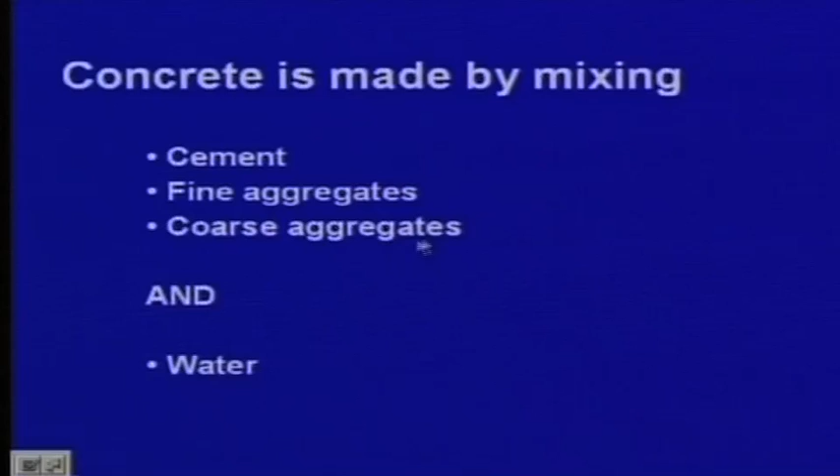As I have told in the last class, concrete is made by mixing cement, fine aggregates, coarse aggregates and water, and the proportion also I have shown as a schematic: coarse aggregates, sand, cement and water. I have already told in the last class, just to repeat one or two slides. We shall come to what is called workability.

Workability means the fresh concrete, or we call it green concrete, can flow. You can mix it, you can put it in any way and you can get any shape. So, it should be workable. If you add less water, then it will be almost dry, you cannot get the required shape, and it may immediately break. If you have more water, then it can flow like fluid, and then also it is difficult to get the proper shape. So, workability is very important so far as casting of concrete is concerned.

So, workability: a concrete which can be readily compacted is said to be workable. The amount of useful internal work necessary to produce full compaction. By useful internal work, we mean that whenever you are compacting the concrete, there is internal friction between the aggregates as well as with the formwork where you are placing the concrete, which you have to overcome. So, on the basis of how much internal work you have to do, we can also define workability.

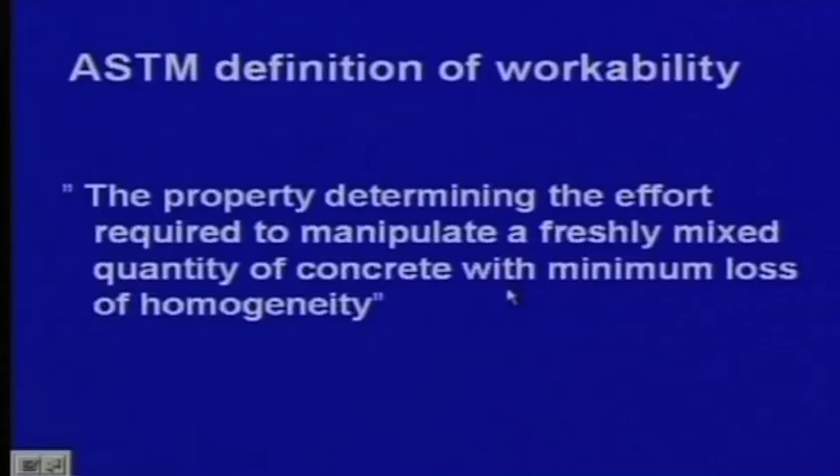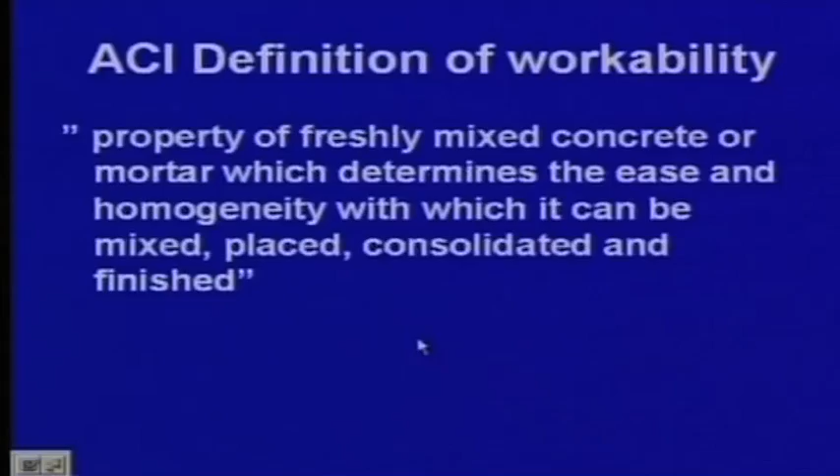So, so far as concrete is concerned, workability is an important property. It is also required because there are so many steel bars, as I told you last class, and when you place your concrete, the coarse aggregate will go in between those bars. Otherwise, if there is a void, then the concrete will become weak and the whole structure will become weak. That is why workability is very important to consider.

Now, another part is called consistency. The ACI definition: consistency is the relative mobility or ability of freshly mixed concrete or, just a minute.

Consistency is the relative mobility or ability of freshly mixed concrete or mortar to flow. This is measured by slump. So, the other way, we can find out the consistency of concrete, and how we can measure the consistency of concrete, that we can find out by slump. Now, what is slump? That we have to find out.

So, I repeat once more, the consistency is the relative mobility or ability of fresh mixed concrete or mortar to flow. So, just getting the consistency, we can find out how we can make it workable. It is the indirect way of measuring workability. So, we can measure by slump.

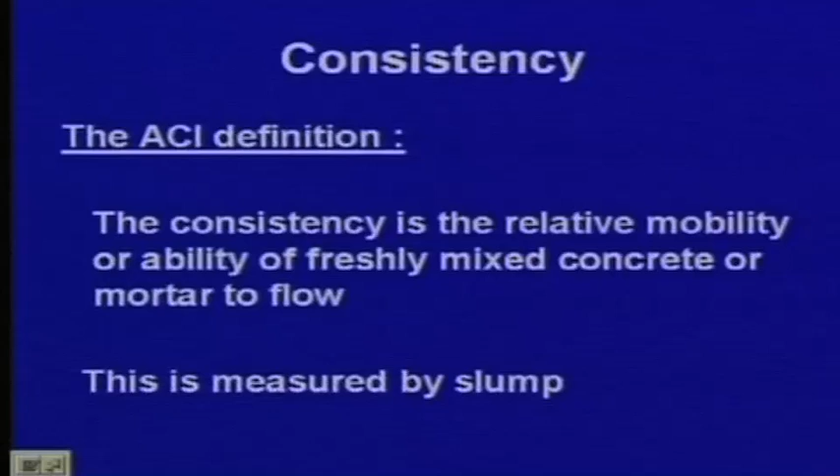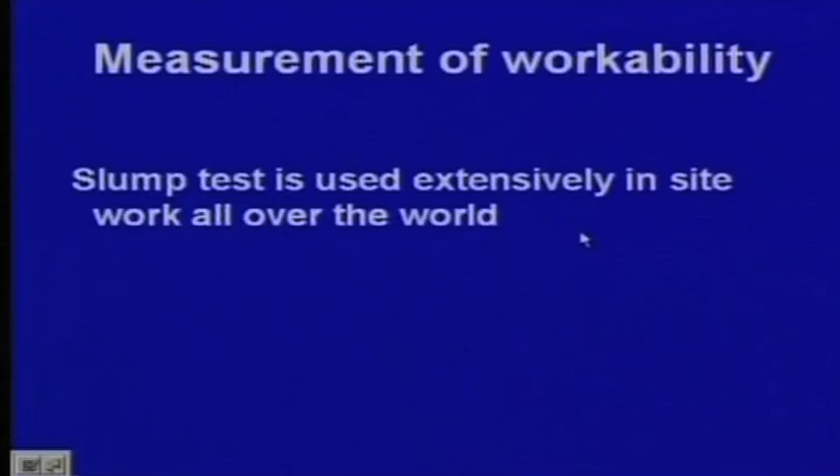So, measurement of workability by slump test is used extensively in site. We are talking about site, after all concrete is cast in the site itself. So, we have to find out the workability from the slump, and the slump test is used extensively in site work all over the world. So, we use this particular test extensively.

So, what is the slump test? The mold for the slump test is a frustum of a cone 300 millimeter high. It is placed on a smooth surface with the smaller opening at the top and filled with concrete in 3 layers. I repeat, the mold for the slump test is a frustum of a cone 300 millimeter high. It is placed on a smooth surface with the smaller opening at the top and filled with concrete in 3 layers.

What we do actually, we pour concrete here in 3 layers, and then we place it here, and then we simply lift it. We lift it, and then concrete will come out, and from there we can find out. So, let me tell you this way. So, this is your slump cone, this is a smooth surface. You are pouring concrete through this. In 3 layers you have to pour, and we have to make 25 strokes.

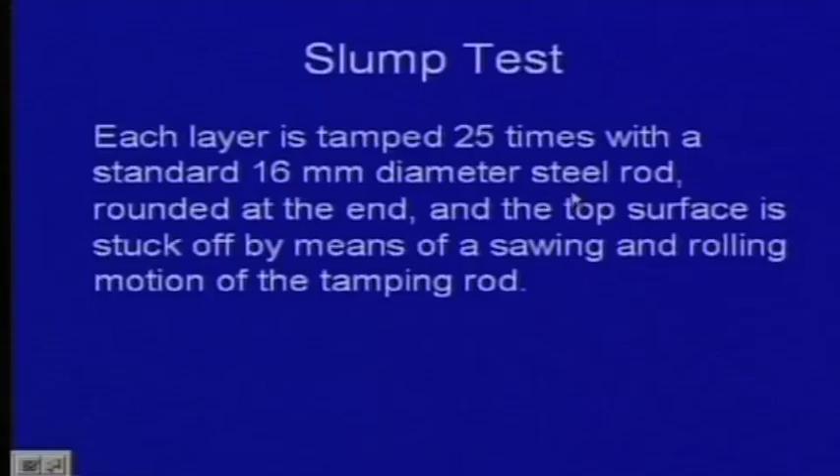Each layer is tamped 25 times with a standard 16 millimeter diameter steel rod, because we have to do some kind of standardization. That is why we are using a 16 millimeter diameter steel rod, and we have to hit it like this, that 16 millimeter bar. So, you place concrete and then you hit it 25 times, that is one layer. Then again you pour concrete, again another 25 times, again you pour the third layer, and then you finish it off over the top.

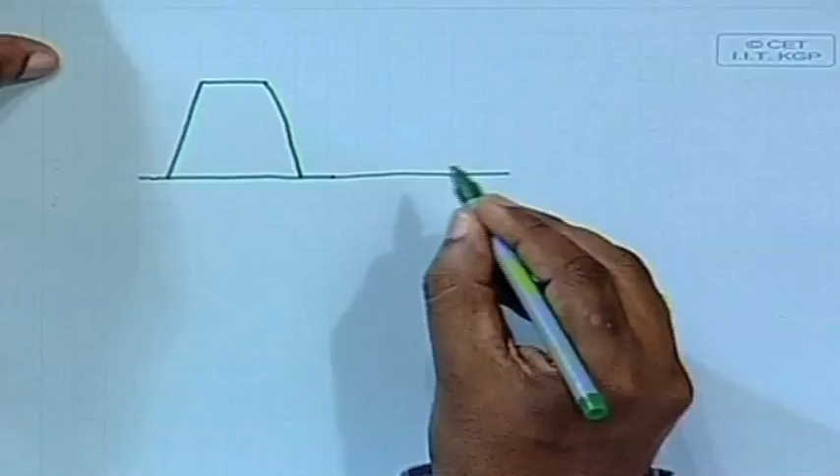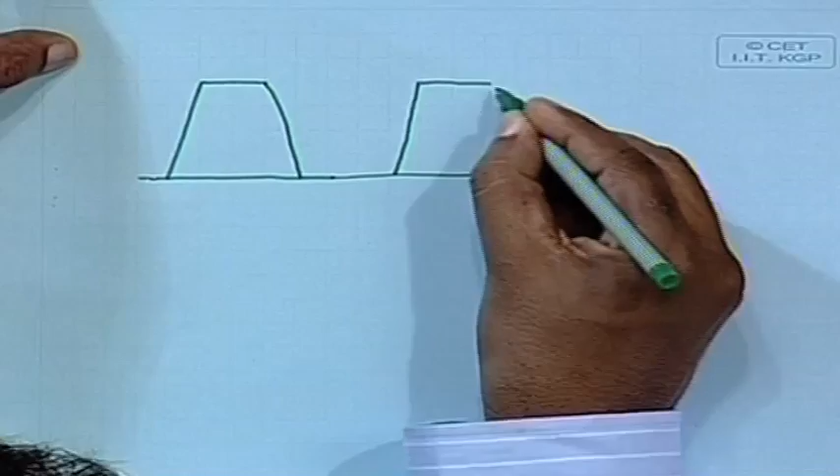Now, when it is done, you take out the cone with those 2 handles. Then what will happen? If the concrete proportion is such that it is almost solid, you may get the same type of cone, frustum of a cone. You can get the shape even after you take it out. Then we can say that we are having 0 slump, there is no slump, it is not coming down.

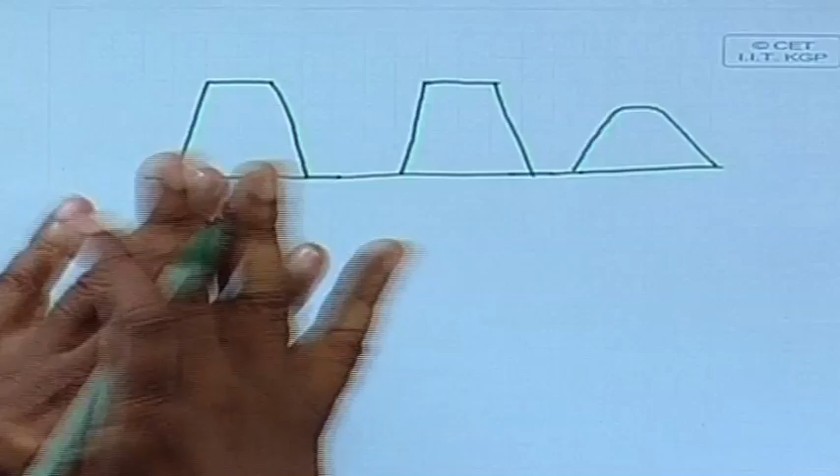We can say there is no slump, but it may happen like this also, it will go out, that means it will try to flow. Then we can say the remaining one, this particular drop, that is the slump. It may be 5 millimeter, 10 millimeter, 20 millimeter, that means more slump, more workable.

That means more slump means more workable. That means you can work with it easily, but you do not know whether you can achieve the strength or not; that is a different issue. We are talking regarding workability of concrete. That means, if we get more slump, then we can say more slump means more workable.

Now, that is why for design mix, when you have to design the mix, you have to specify the slump also, how much slump you need. That is one important criterion. Generally we consider what is called nominal mix. I have told, say, M15; nowadays M15 is actually not allowed as per IS 456-2000. The minimum grade permitted is M20.

M20 means 1:1.5:3. Similarly, M25 means 1:1:2. Let me repeat. Initially M15 was there, that is 1:2:4: 1 cement, 2 sand or fine aggregates, 4 coarse aggregates. M20 is 1:1.5:3, M25 is 1:1:2. These are called nominal mix.

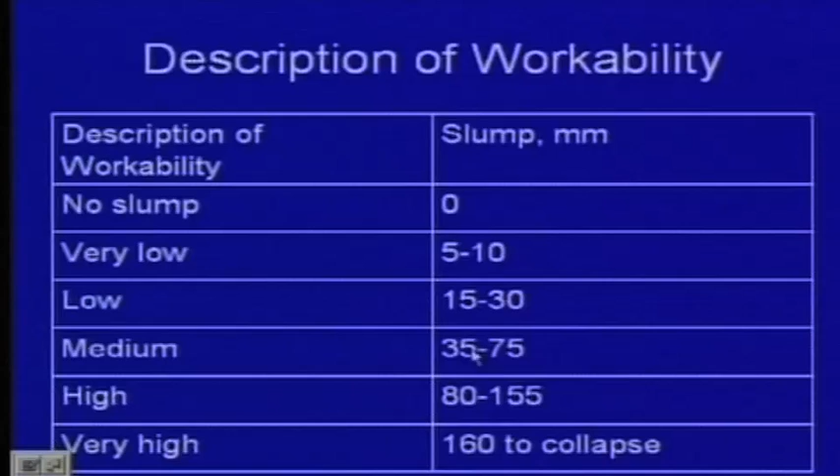Within this range, we consider one particular case. In other words, it is a little bit fuzzy; we consider that gradation. The other aspect is durability, because workability is one aspect, and the other aspect is durability.

So, what is durability? Concrete should maintain its required strength and serviceability. Please note, I am repeating this: one is strength, the other is serviceability. These are two different criteria which go hand in hand, strength and serviceability. So, concrete should maintain its required strength and serviceability during the expected service life.

A structure is designed for a certain life, say 50 years or 100 years. So, we expect that it should be durable; at least it will withstand the load for which it is designed. Concrete is said to be durable if it withstands the process of deterioration to which it can be expected to be exposed. Obviously, concrete cast today will deteriorate over time; we can't help it, we have to accept it.

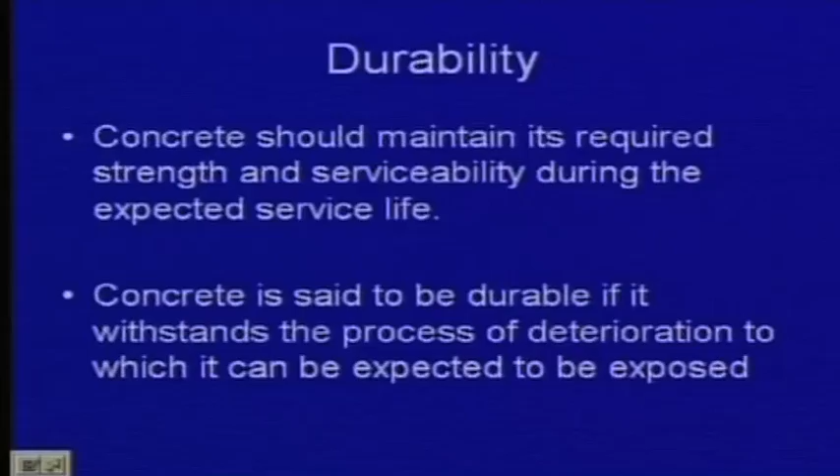So, whenever the concrete is exposed, even if it deteriorates, it will still withstand the load for the expected life for which it is designed. So, workability is one aspect whenever you are casting, and the other aspect is durability.

Now, coming to compressive strength. For compressive strength, I have told you about cubes; we also use cylinders, tested after they are hardened for 28 days. In the American code, ACI specifies cylinders, but in the Indian code we go for cubes. We use both cubes and cylinders in our laboratory, and we shall cast both, but our code goes by cube strength.

During the 28 days before testing, the cubes and cylinders are stored under water or placed in a constant-temperature room maintained at 100% relative humidity. Generally, we simply put the cubes in water. We have a storage reservoir, we put the cubes in, and before testing we take them out. This is the standard thing we do for compressive strength, on the basis of cubes and cylinders, and generally we test on the 28th day itself.

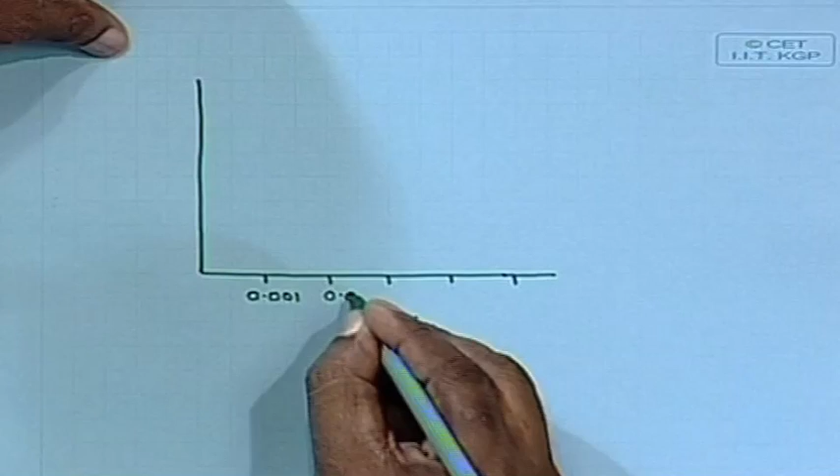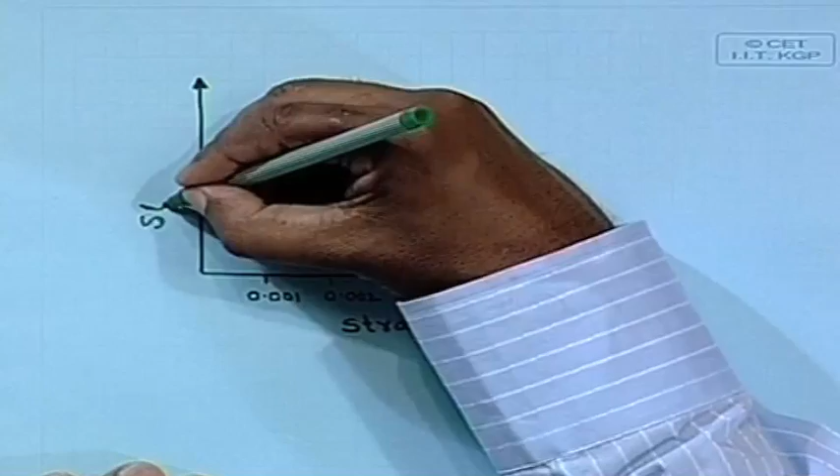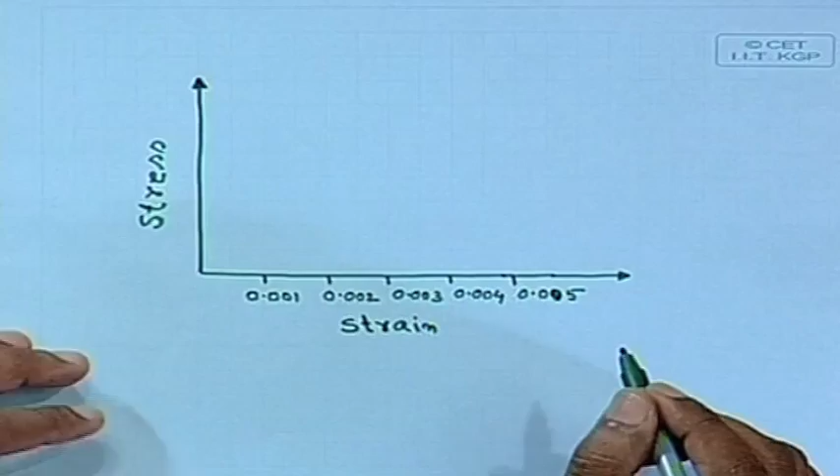So, coming to this, I can show you one graph that is very, very important, because we have to find this out. We have strain, and we have stress. Now, we have different types of concrete. If we test the concrete cubes, we can measure the stress and strain.

In other words, you can find the applied load and the deflection, say for a 150 millimeter cube, how much it is compressed. From there we can find the corresponding strain and the applied load, and we know the contact area, approximately 150 by 150, because after casting it may be 151 by 152. So, we measure that exactly for a particular cube.

Generally it is 150 by 150 by 150, but the top and bottom surfaces may be 151 by 151 or 151 by 152. We measure that, and on that basis we find the corresponding stress: applied load divided by area. On that basis we can find the stress-strain curve. This is the important part for any material, you have to find the stress-strain curve.

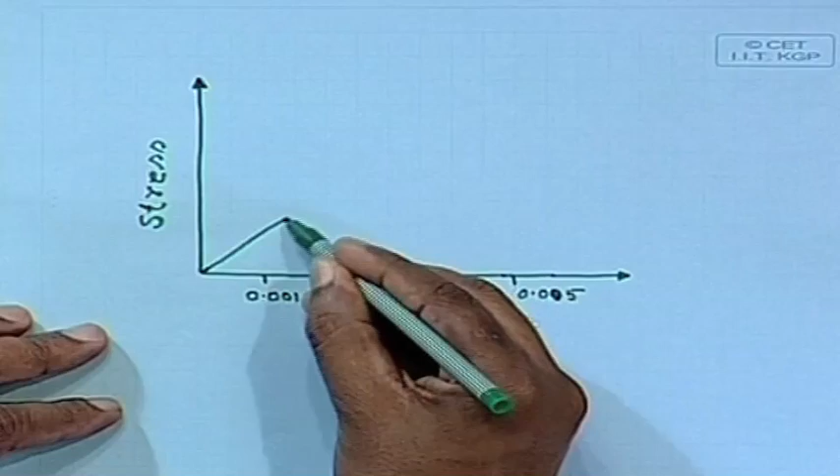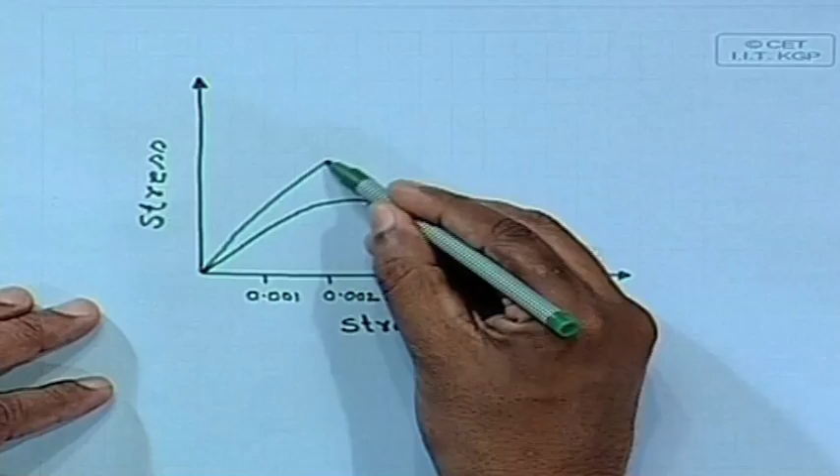So, it can go like this, the other one can go like this, and if the concrete is higher strength, it can go a little more, like this. This one we consider low strength, this one medium strength, and this one high strength concrete.

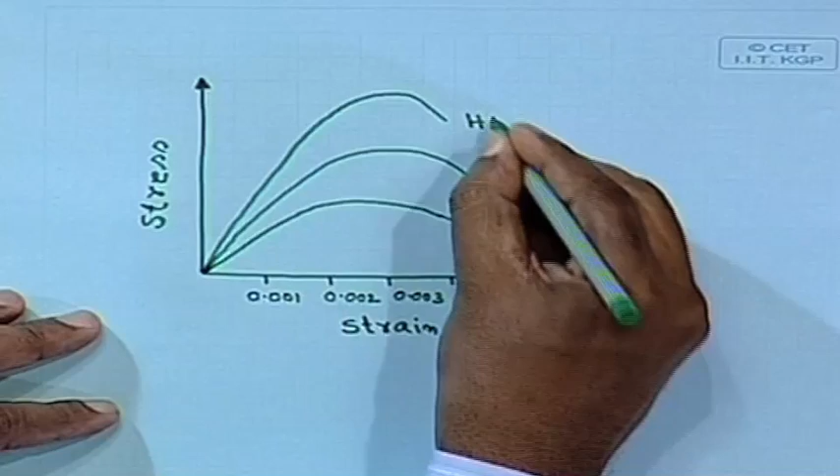So, it is worth mentioning, generally M20 up to M25 we use for reinforced concrete. For pre-stressed concrete we take M35, M30, and for concrete pavements we use M40 grade. So, for different applications we use different strengths.

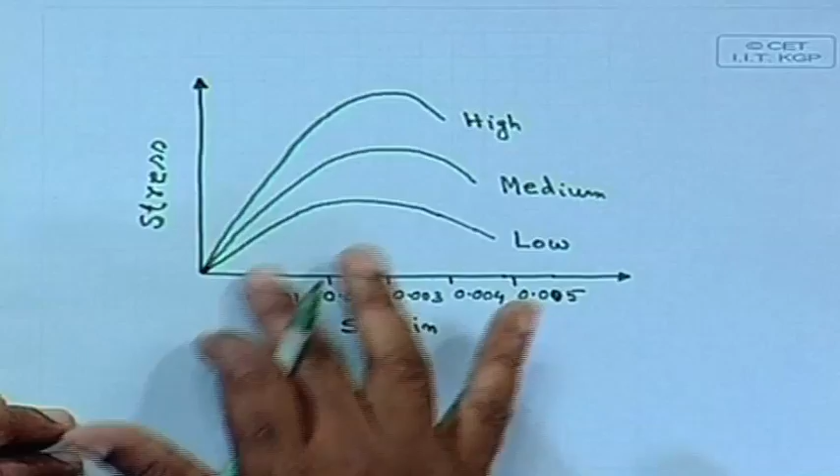Now, this is the stress strain curve. When we go for actual design, in actual practice if you test it, you may get this type of stress strain curve, and that you can only get from experiments, because there is no other way to find it theoretically. For steel also you have to do it the similar way, you have to find out the stress strain curve.

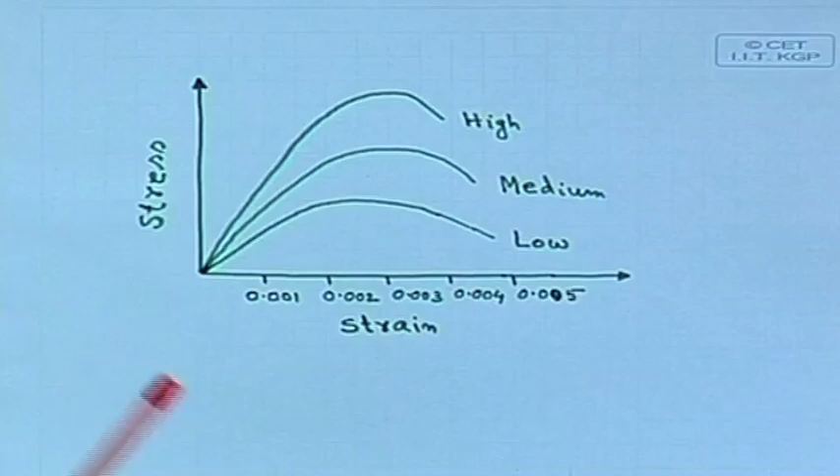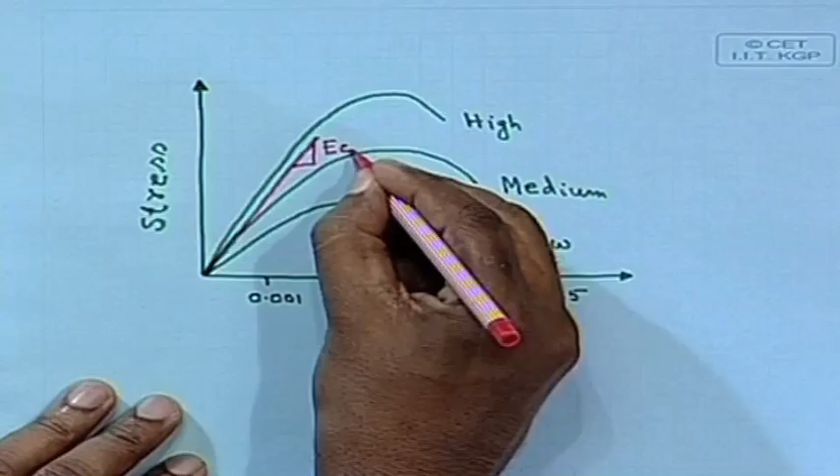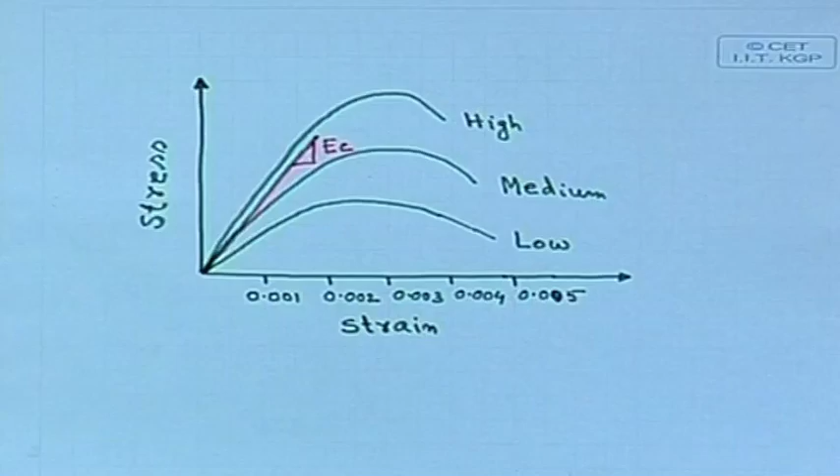And you can find out another thing, let us say for this particular one, EC, the modulus of elasticity of concrete. That is another part we have to find out. From the stress strain curve we can find out the modulus of elasticity and the behavior, because at a particular strain we are interested to find the corresponding stress. That is very important for our design calculation, and that is why this stress strain curve is so important.

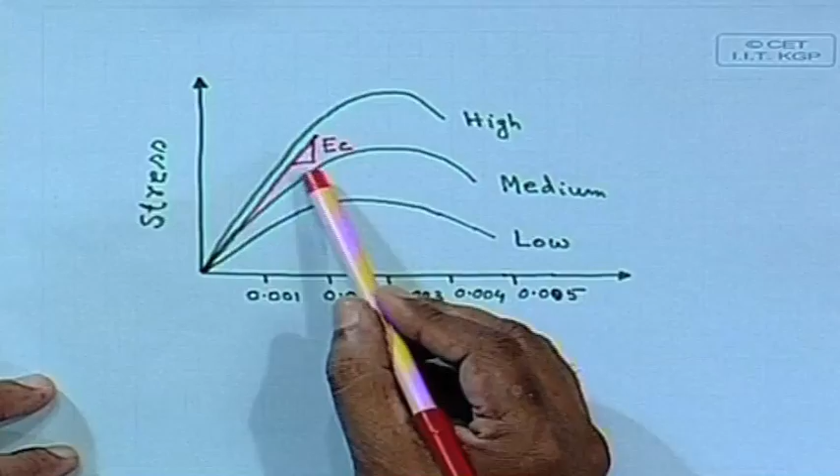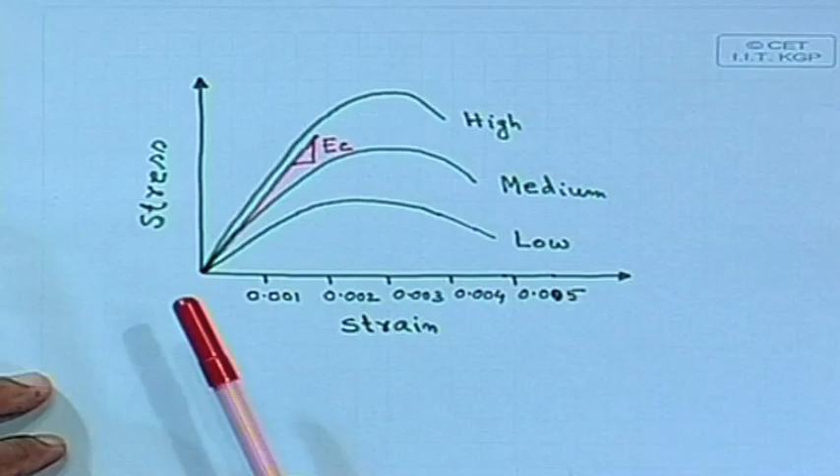Sir, the modulus of elasticity will vary according to the stress strain, because it is not linear. Yes. So, we are taking the initial one. If you consider the secant modulus, a lot of other moduli you will get; at different points you can find different moduli of elasticity. But here we are considering the initial one, and we shall use it. For concrete, the corresponding modulus of elasticity we shall get from IS 456.

Regarding the tensile strength, generally it is 8 to 10% of the compressive strength. For our design we shall simply ignore the tensile strength of concrete; we assume concrete will not take any tension, and it will be taken care of by the steel only. One interesting thing: when we say that, what are we going to assume?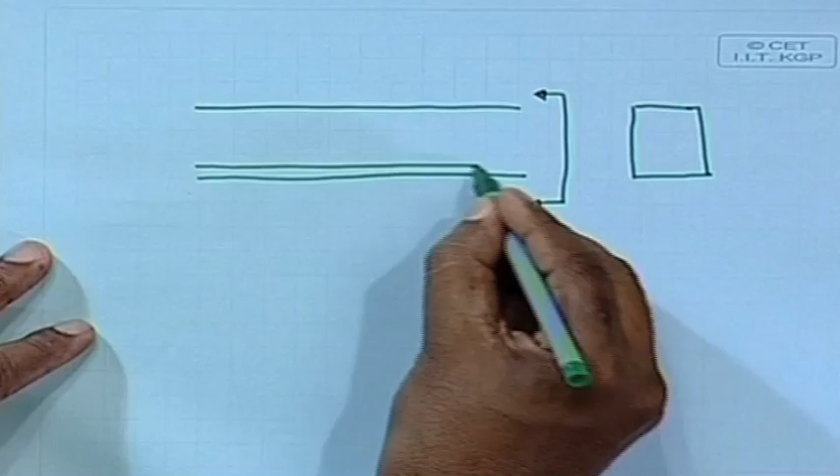Let us say this is the section. If we look from this side, we may get a member like this. Let us say there is a bar here. Let us put a proper boundary; the detailing is not like that, but since we have not gone to that level, consider this is the longitudinal section with this steel bar. Though the support is not like this, let us provide a support we are familiar with, and apply a load.

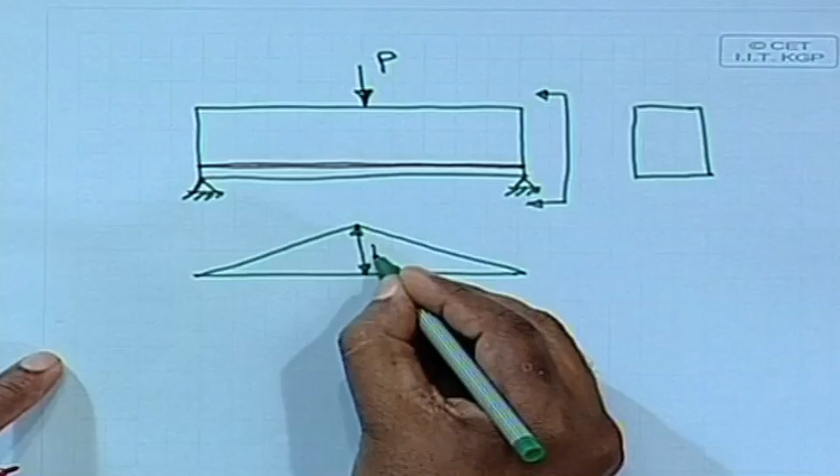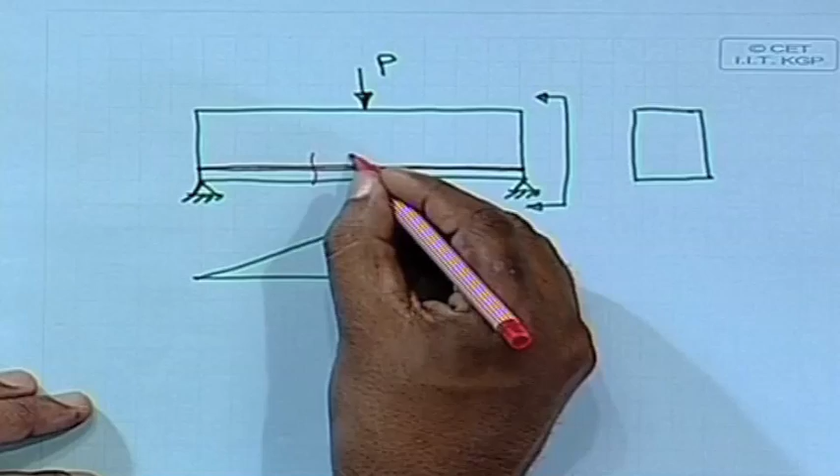We apply load, then what will happen? We have to find out the bending moment. If this is P, then this one is PL by 4. So, the top will be compressive and the bottom will be tensile. When we assume that concrete will not take any tension and only the steel shares that part, it means that there are cracks here, so many cracks here.

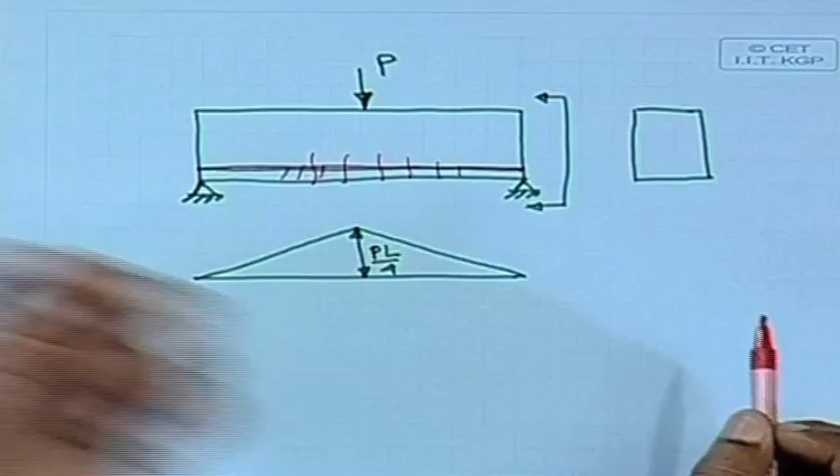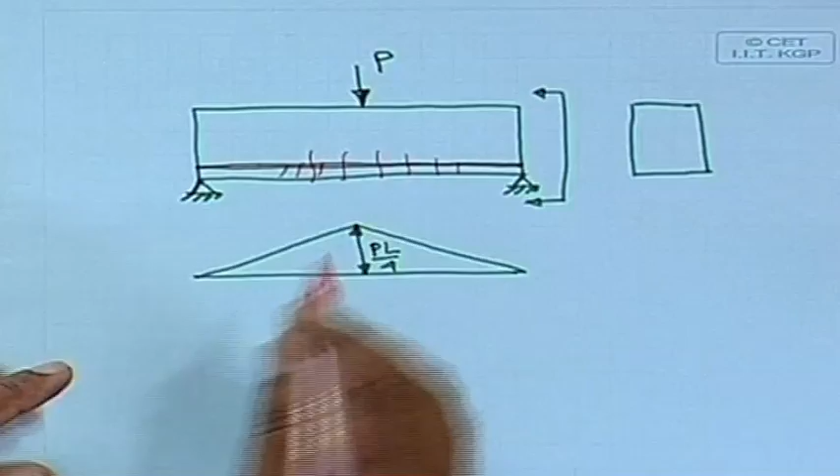That means there is no connection with the concrete. So then only I can say steel is only taking load, because if there is no crack, if it is continuous, that means concrete also takes the load. But since I have already assumed only steel will take load, that means we are considering a cracked section, with a neutral axis somewhere, not the center line. Above the neutral axis it takes compression, and whatever concrete is below will not take any tension - the steel only will take that. That is the assumption we are making for this case.

But coming to this particular one, just for reference, we consider this - we can get it from experimental observation - that 8 to 10% of the compressive strength can be achieved, as far as tensile strength is concerned.

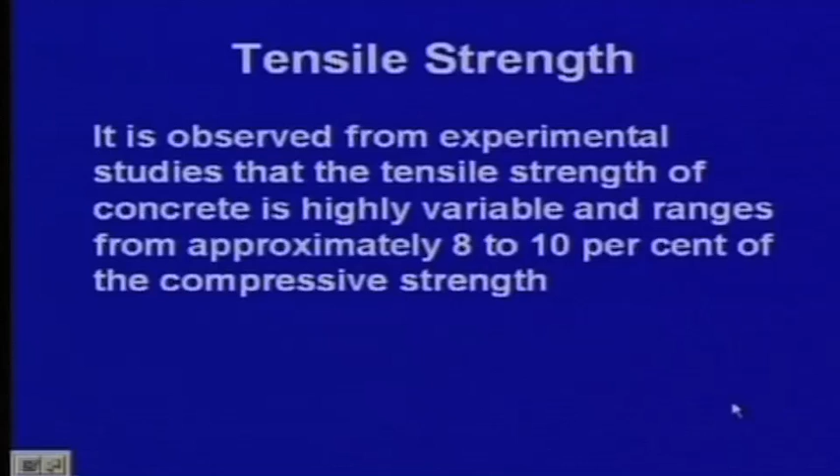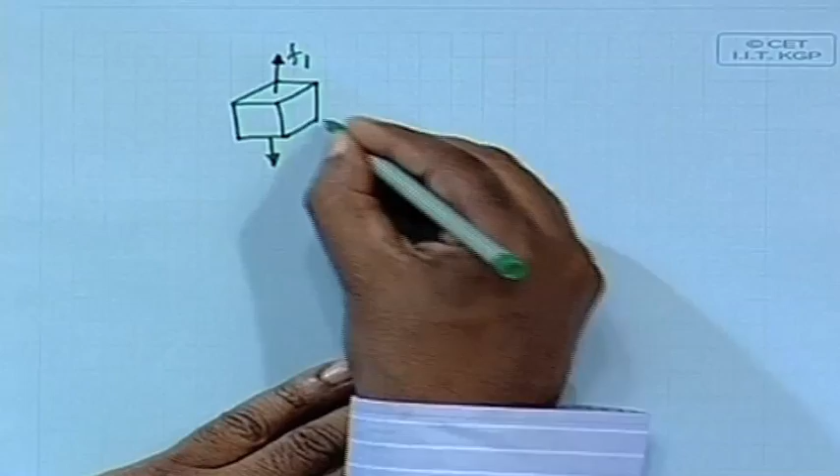Another part is called biaxial strength. What is that? If we take one element, and this is the corresponding stress - we are taking a particular point in the whole body, and finding the corresponding stress in two directions. So f1 and f2 are the two stresses, and how they interact. That one we can also find out, and that is called biaxial strength.

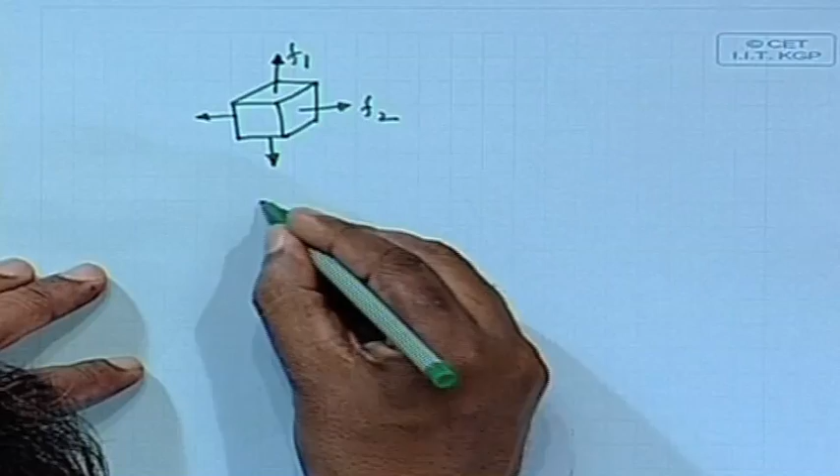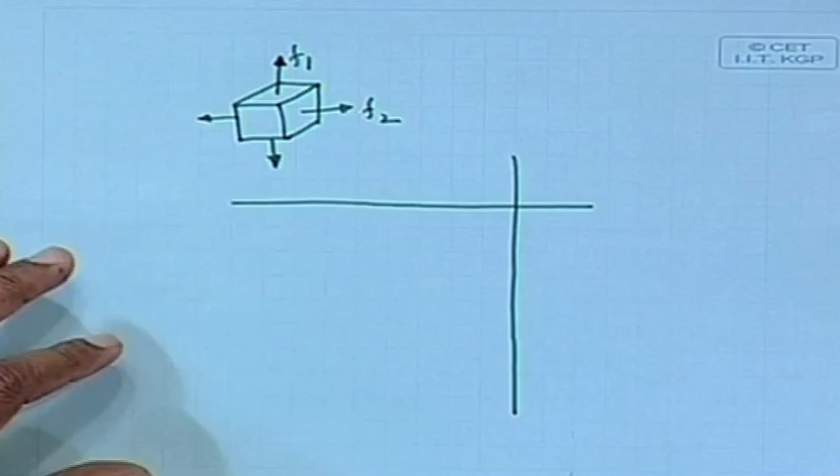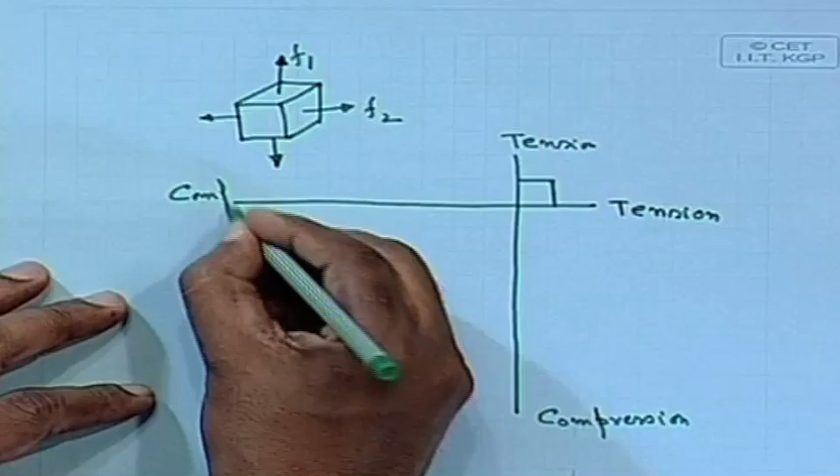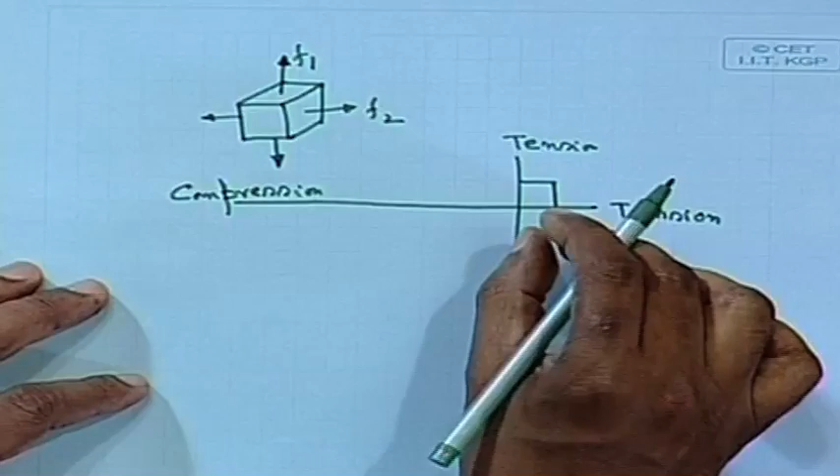Generally we get it like this. We shall come again in detail at a later stage. Just to give you a schematic description, this one is tension, and this one also tension. We are plotting tension here, and here compression. What we shall get here, since concrete is very weak in tension, we shall get a very small component here.

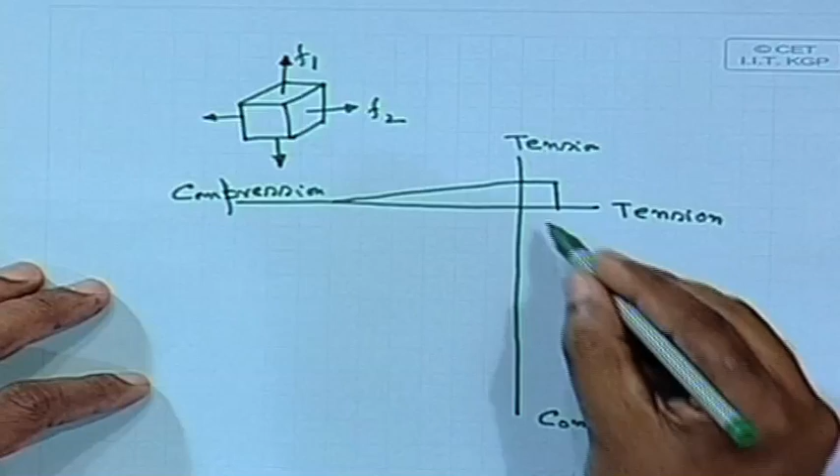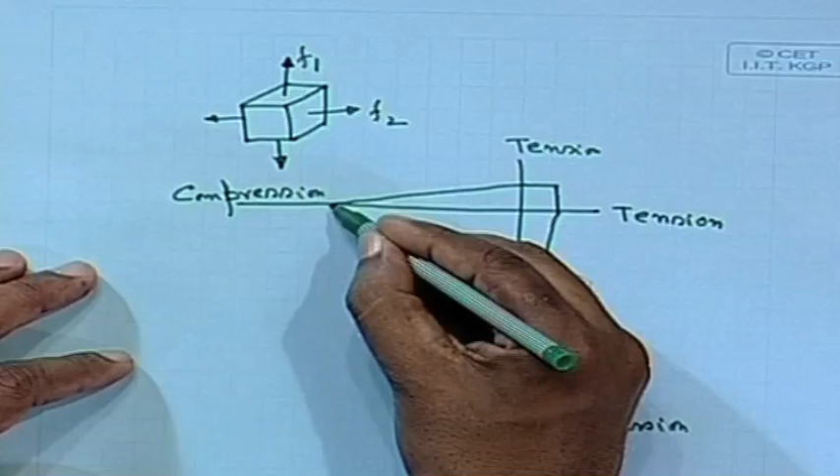The other side, so we can go like this, and this particular one, because this side - the compression side - it will be more.

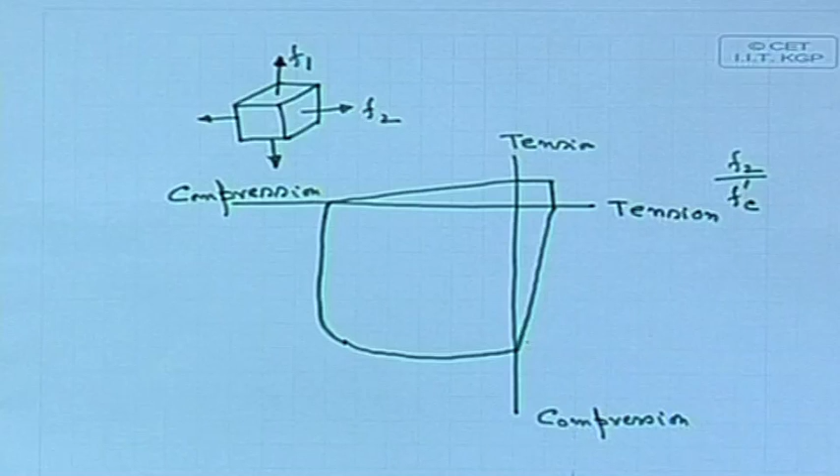This is the limiting zone we are talking about, for one element - if you remember solid mechanics and failure theories, there you find principal stresses sigma 1 and sigma 2, let us say here F1 and F2. This particular one we can make it F1. F dash C is the failure load, the maximum compressive strength it can take, which we get from the cube strength. So that is F dash C, and this is F2 in one direction, and on this side we get F1 by F dash C.

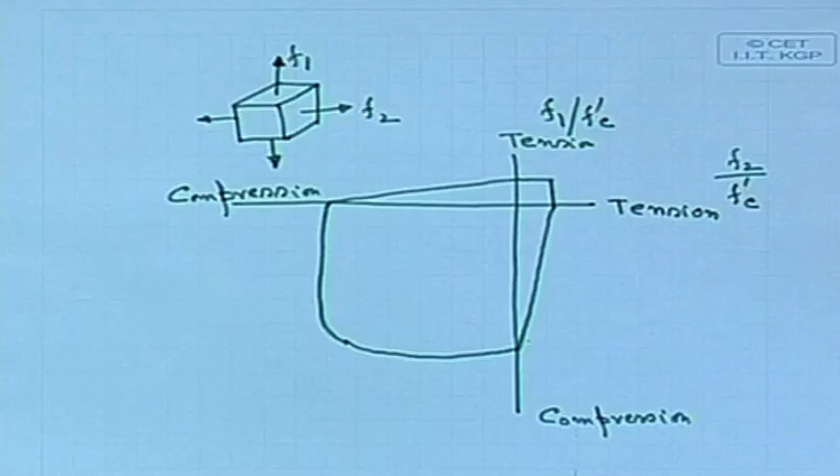What we can do here is find out the zone - how far it will go in tension and in compression. Whenever we talk biaxial, both axes could be tensile, both could be compressive, one axis tensile and the other compressive, and vice versa.

So that means these are the 4 possible cases that can occur with biaxial strength. Let me write that down - biaxial strength. So far I told you about the cube, that is uniaxial strength, because we simply apply load and find the corresponding failure load, the maximum load it can take. Now if it is biaxial, it can have compression-compression, tension-compression, compression-tension, and tension-tension, for all 4 possible cases. Since concrete is very weak, you get a smaller zone. If it goes beyond this, it means it will fail. So this is the zone within which concrete is safe.

In this particular zone here, we can say this is tension-compression. Similarly, considering symmetry here also, tension-compression, and this side we have maximum, because concrete is very strong in compression - that is why we get more in this direction. So this is useful to find out where we have biaxial stresses, loading applied in 2 directions - it is very useful. From there we can find out the failure load.

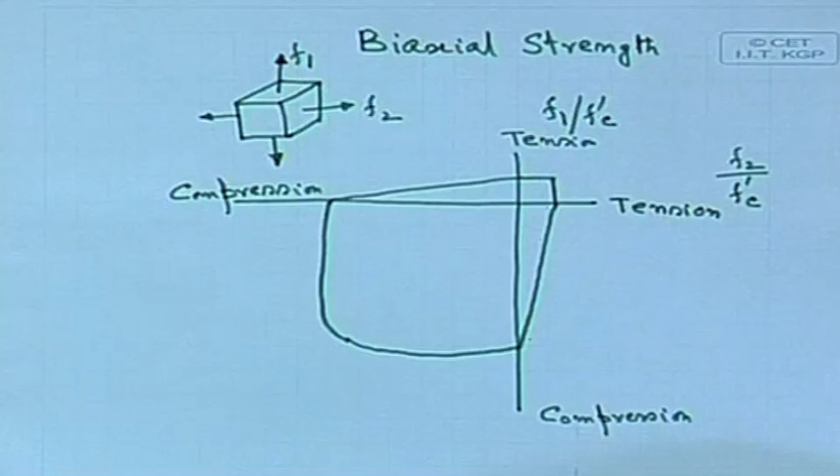The other important part is called creep, because I started telling you about compressive strength, tensile strength, then biaxial. Now we are talking about creep, because this is important - it is time dependent. Both axial and bending deformations of reinforced concrete members increase with time, so deformation will increase with time. It may happen this particular way.

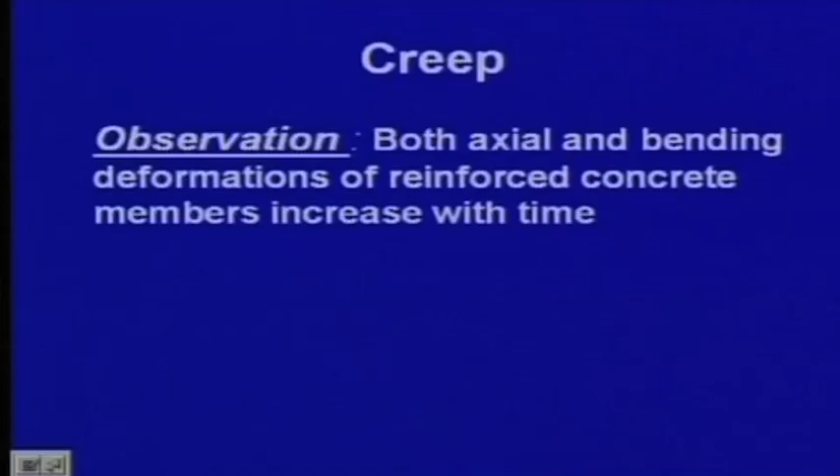What we can do is show that with another curve. So we can say, maybe we can consider age in months. Let us give the heading 'creep'. So what happens here, we have cast it, and this one is deformation.

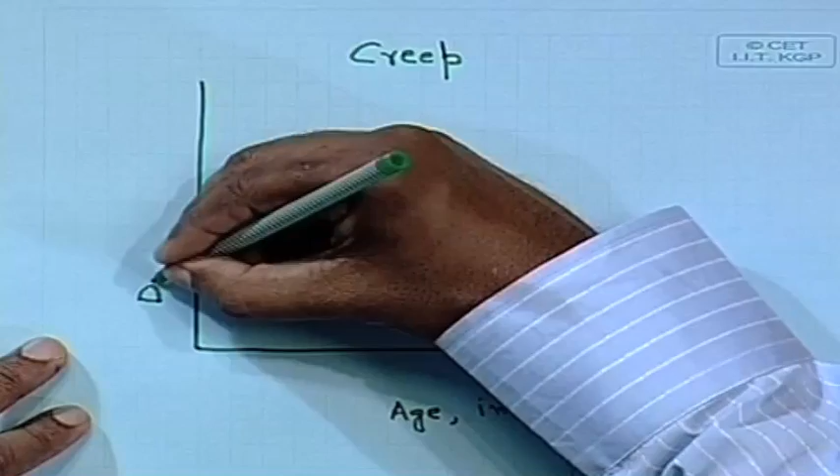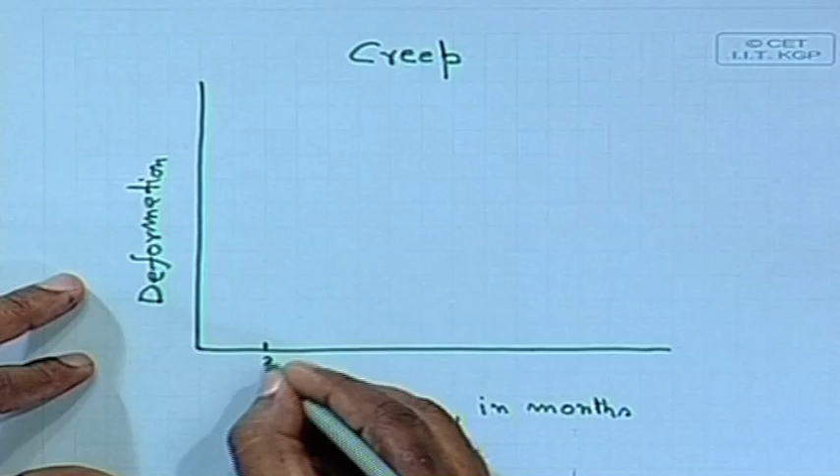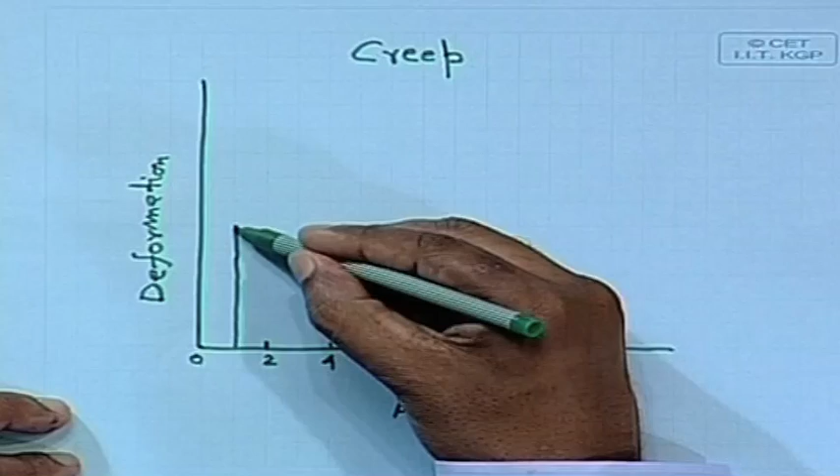Immediately there will be elastic deformation. We have applied load, so immediately we shall get that elastic deformation, and then it will start. Over the months we may find out a curve something like this. We are having a constant load and the curve may go in that particular fashion, where it will keep on deforming and go like that. This one, under constant load.

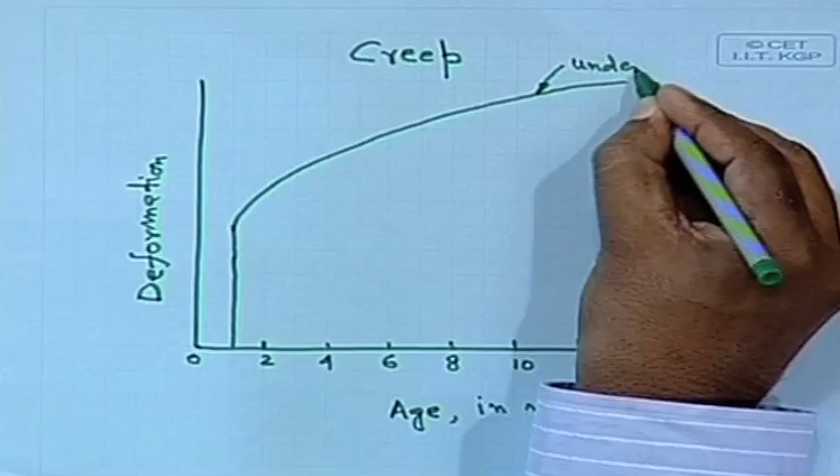So it may happen that we are considering one reinforced concrete beam, say 3 meter or 5 meter reinforced concrete beam, and at the middle we have applied certain load, say 5 ton. Immediately we shall get certain deformation, deflection. We can measure the central deflection, and that one we are getting this much, that deflection we are getting this much.

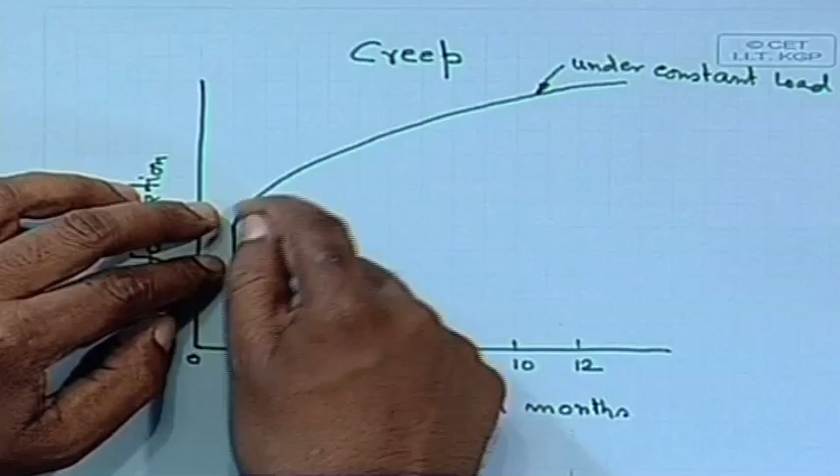When we are getting this particular deflection, now if we keep that load, even then it will start deforming, and that is due to creep, but the load applied is the same constant load, say 5 ton for example.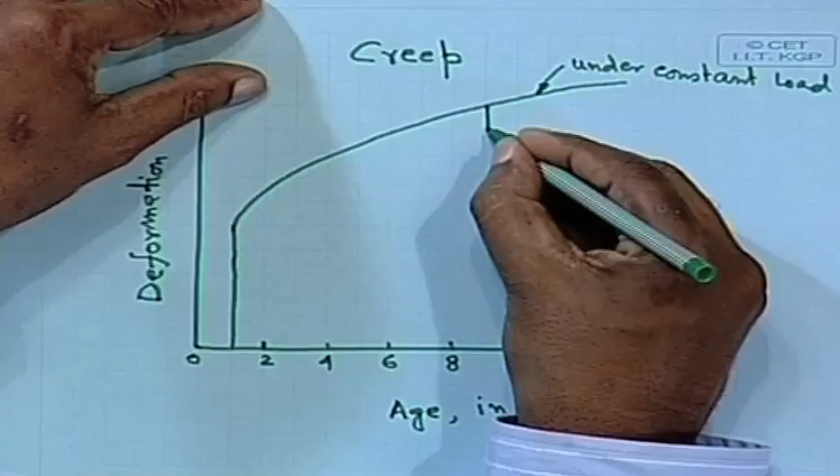Now after a few months if we take out that load of 5 ton, then what will happen? We shall get the elastic recovery, but it will not come down to 0. Even if we take it out after a few months, it will not come down to 0, because immediately if you take it out then it will come back, but we are taking it out after a few months.

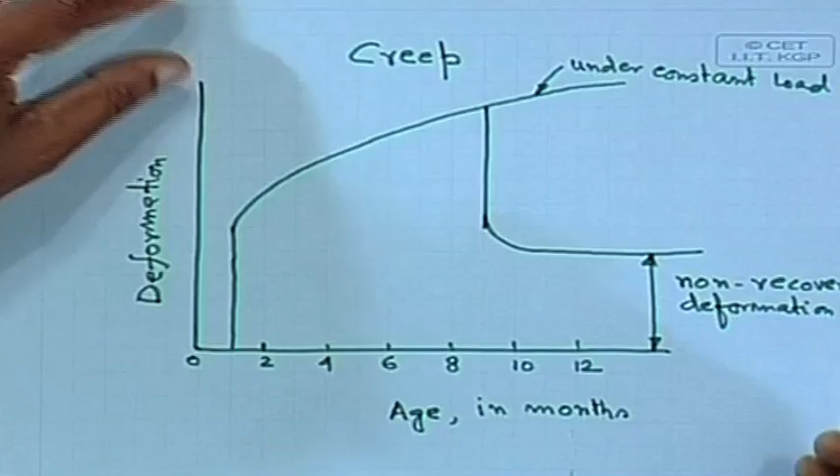So this is your non-recoverable deformation, and that we are getting due to creep, that is a time dependent phenomenon that we are getting, due to creep.

Yes, it comes almost the same. Whenever we come to that particular design, you shall find out it comes almost equally in that range, and that is based on empirical experiment observation, but we shall find out that particular aspect later on.

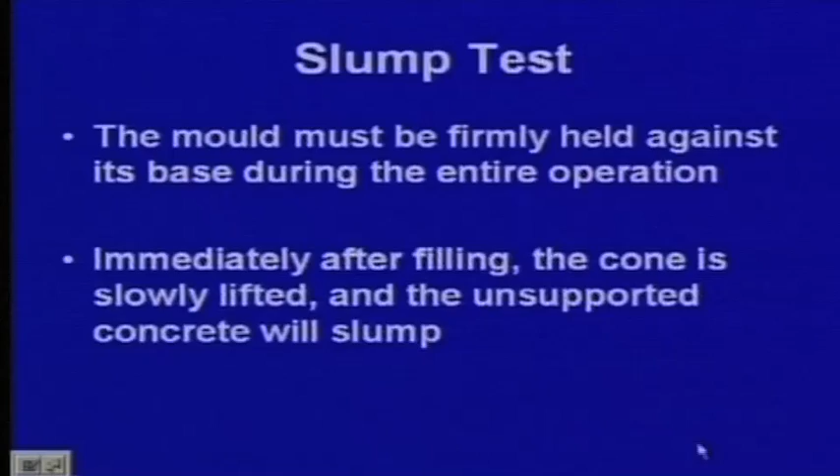Oh no, we have come back too much. Just a minute.

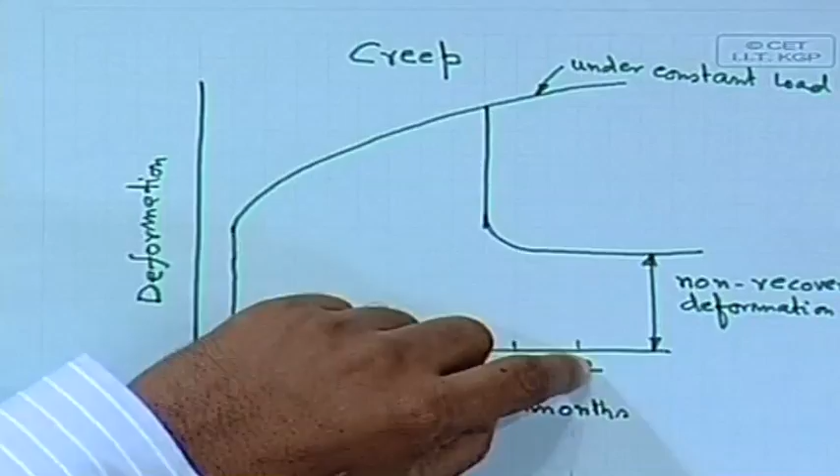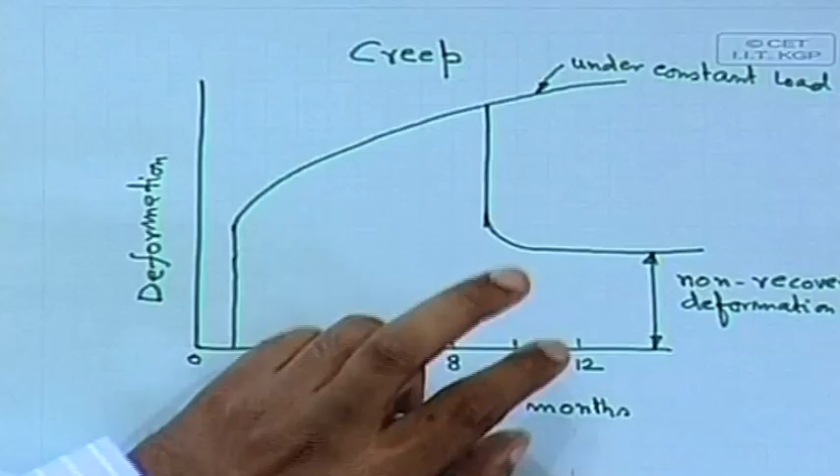That means we have to consider at least 1 year. At least I should make that particular curve here at 12 months, so that we can account for that. So please note, the curve I told earlier, we should make it at the 12 months. Okay, so this is the one that creep we are considering. The other one, another aspect, is called shrinkage.

This is your another aspect, that as the moisture evaporates, the concrete volume shrinks. The shortening per unit length associated with the reduction in volume due to moisture loss is termed the shrinkage strain, or simply shrinkage. I repeat, as the moisture evaporates, the concrete volume shrinks. The shortening per unit length associated with the reduction in volume due to moisture loss is termed the shrinkage strain, or simply shrinkage.

So creep and the other one, shrinkage, these are the two things that you have to consider in our calculation.

Couldn't we see the slide in which there were two parts of creep? Yeah.

Okay, so one is the initial or instantaneous deformation, and the other is the time dependent deformation termed creep. So generally we consider this for at least 1 year.

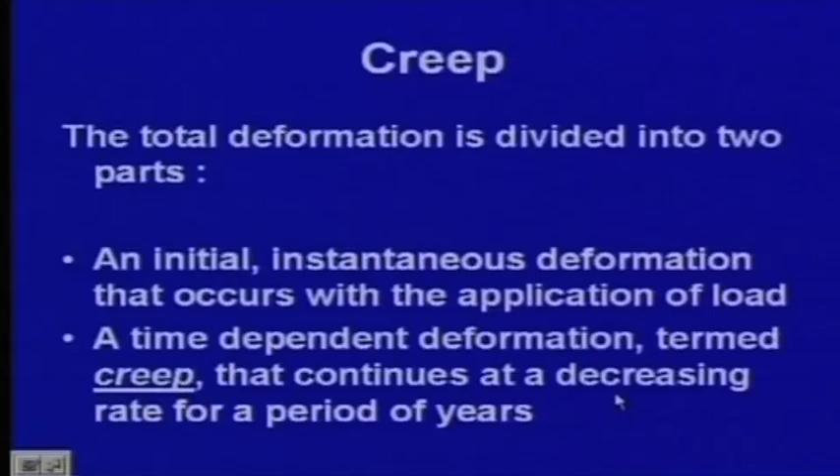So, I shall continue. Okay. Now, we have almost finished the materials part. For steel also we shall consider what our IS code says.

Now we know the limitations we have to work with. Concrete is not so simple, sometimes it is really a nuisance, but even then almost 90% of the work we do is with concrete only.

Concrete also has another important aspect, that is workmanship. Workmanship of concrete, if done properly, you can see that the work is done well. For example,

if we consider our institute main building, even though it is old, you will not find any crack. That means the workmanship was really good. Whereas sometimes in new buildings anywhere you may find cracks, which means there is a difference in workmanship. If it is done properly, it will withstand the load and remain there for so many years, for the expected life for which it is designed.

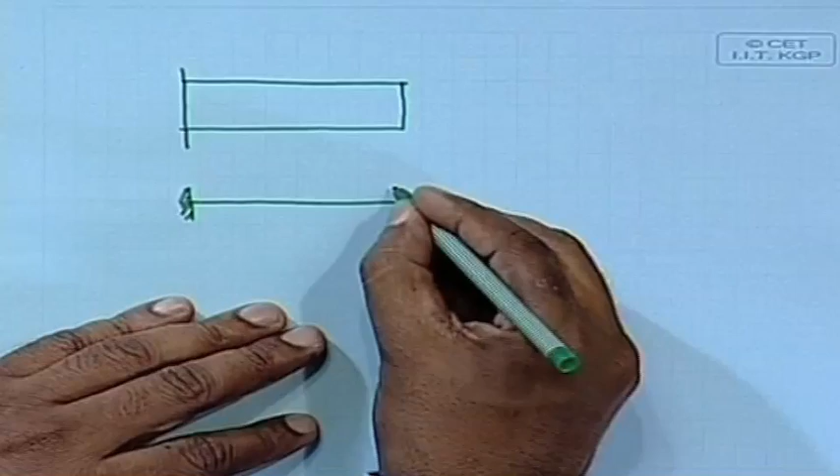We shall find out for your cantilever beam. If we consider a cantilever beam, this is your cantilever beam. In another way, you are familiar with it simply like this. This is your cantilever. So far you have done this type of problem, and we can apply a certain load, say P,

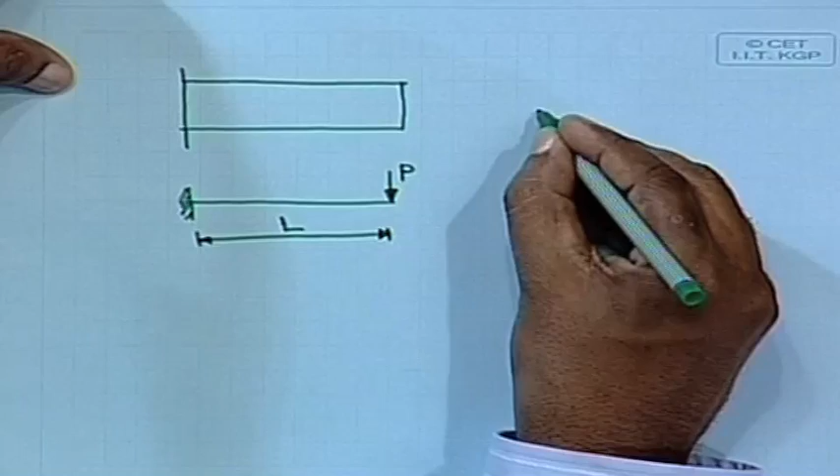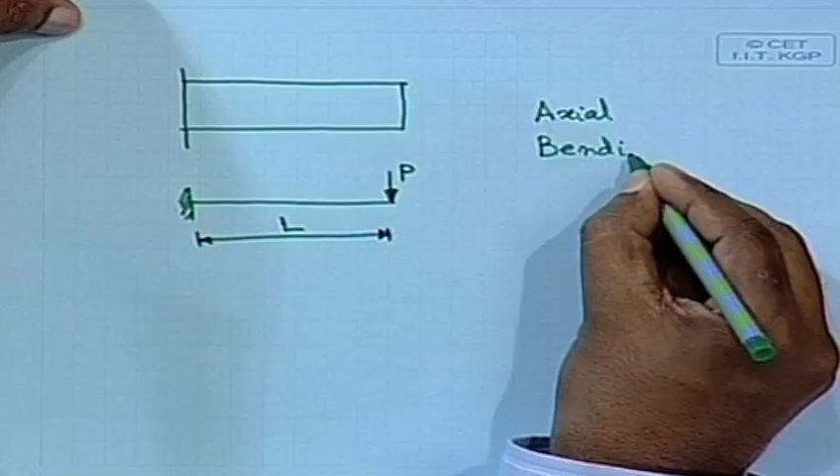and let us say, when we talk about this particular problem, we have to first provide a suitable section for this beam. Whenever we talk about a beam, we find it can have axial load, bending, shear, and torsion.

Different elements, depending on how they are oriented or configured, will not necessarily take all the loads. For example, for this particular beam, the governing, dominating ones are bending and shear. So you can find out the bending moment diagram, and you can find out the shear force.

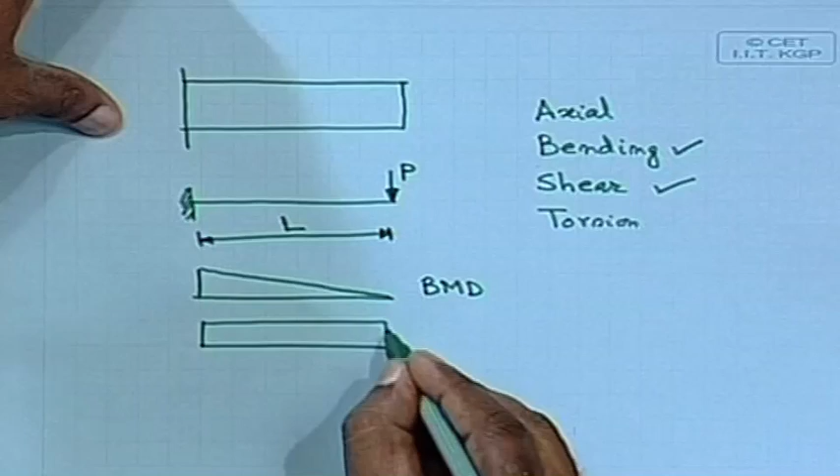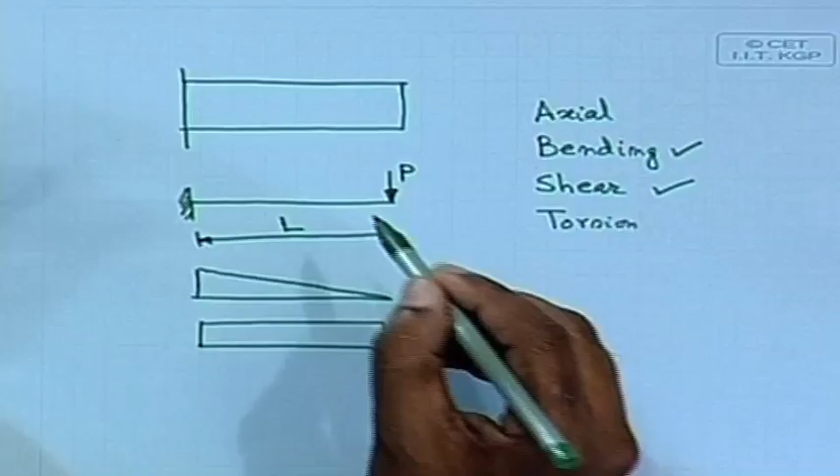So what we shall do is, to take care of the bending, we have to provide a suitable section and provide the longitudinal reinforcement. In this particular case, the top will be in tension, which means you have to provide reinforcement at the top.

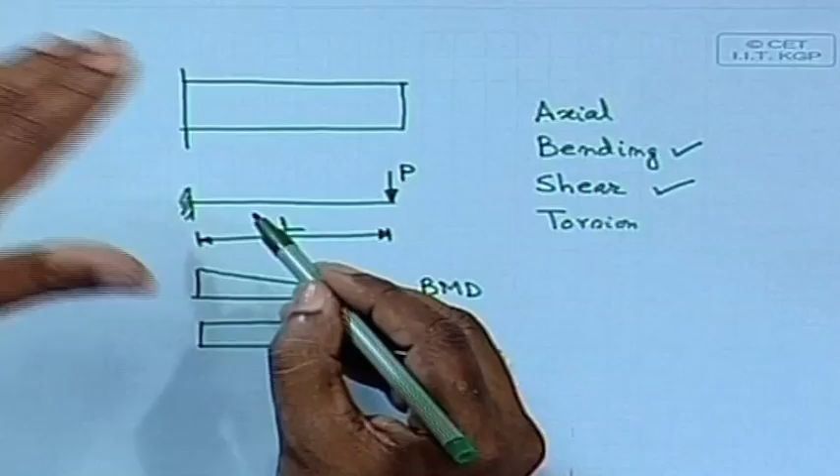Now, by mistake if somebody provides reinforcement only at the bottom, when the top reinforcement was supposed to be given, then if you remove the shuttering, the cantilever beam will simply collapse, and this has happened in reality. This is called the detailing of reinforcement. Even if your calculations are correct, wrong detailing at the construction site will mislead to a disastrous end. That is why in reinforced concrete, detailing is also very important.

So we shall come to the different methods and start the design of beams, beginning with flexure, that means bending. We consider bending separately, shear separately, torsion separately, all designed individually. So for bending, we shall start with bending. Next class we shall start with bending and its different methods. Okay.